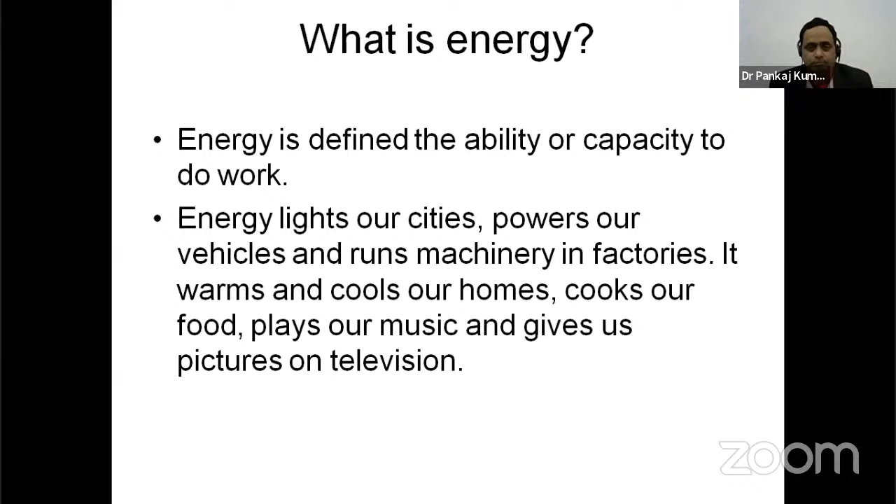What is the conservation of energy?

Already most of the people know about the conservation of energy. Energy can neither be created nor destroyed. It can only be converted from one form to another. It is very simple to understand the conservation of energy.

For example, in a room heater, electrical energy is converted to thermal energy. In a similar way, a turbine converts mechanical energy stored in steam to electrical energy. So how does energy convert from one form to another? This is simply known as conservation of energy.

If we go to previous times, energy use has changed a great deal since people relied solely on the sun, their own strong bodies, or beasts of burden as energy resources. So you see the power of the sun, the strong body, beast of burden as energy resources. This is our previous time.

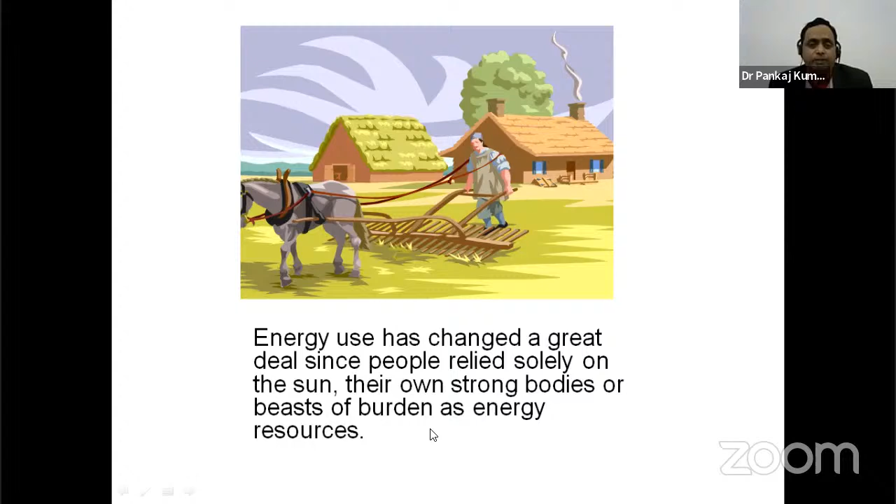And if we go in that direction, long ago, people learned how to use water power to turn paddle wheels and wind power for transportation and irrigation. This is a very typical time for agriculture and typical history about the use of energy.

So there are various problems in that direction. People learned how to use water power to turn paddle wheels and wind power for transportation and irrigation. This is our historical aspect.

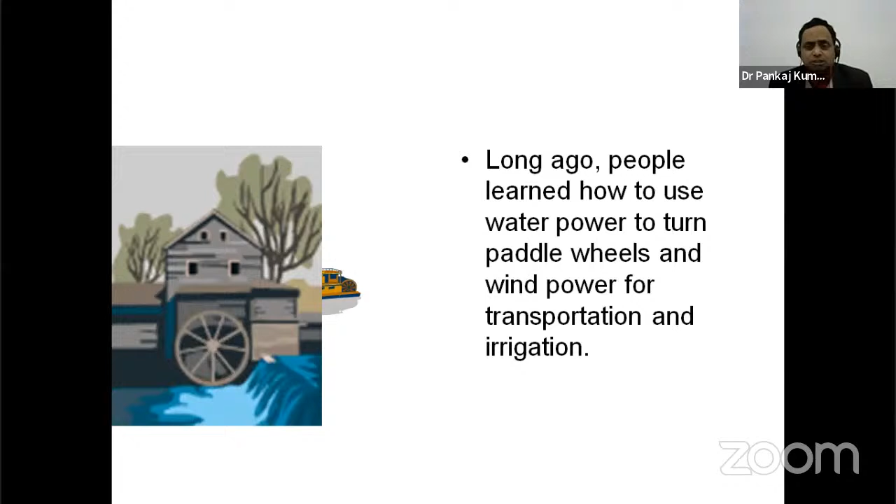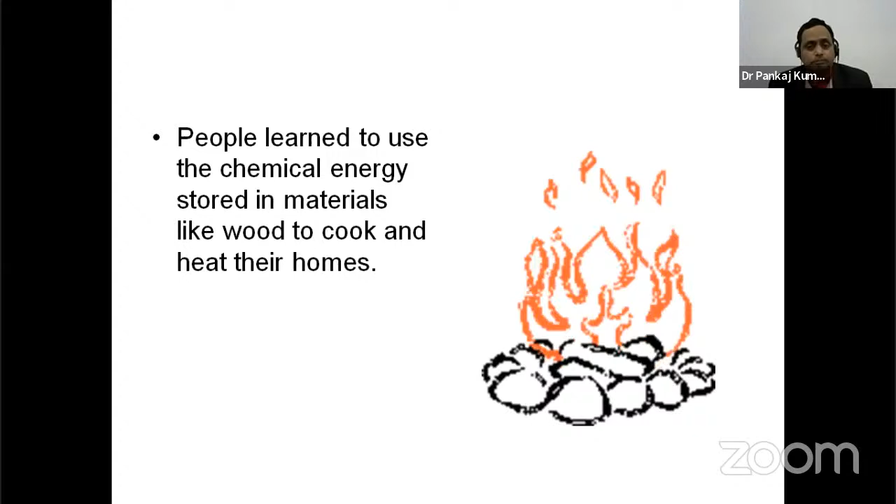People learned to use the chemical energy stored in materials like wood to cook and heat their homes. But machines and technologies introduced during the industrial revolution of the late 18th century required the use of other energy resources, especially fossil fuels.

There are types of energy. Mostly energy is used in two forms: one is known as renewable energy and the other is known as non-renewable energy. The basic difference between renewable and non-renewable energy is very clear. Renewable energy can be used and can be renewed, but non-renewable energy is used only once.

In renewable energy, it is the energy obtained from sources that are essentially inexhaustible, such as sun and wind. The power of the sun and wind we have used again and again. That is the natural phenomena which occurs in our daily life. So the sun is the ultimate source of renewable energy.

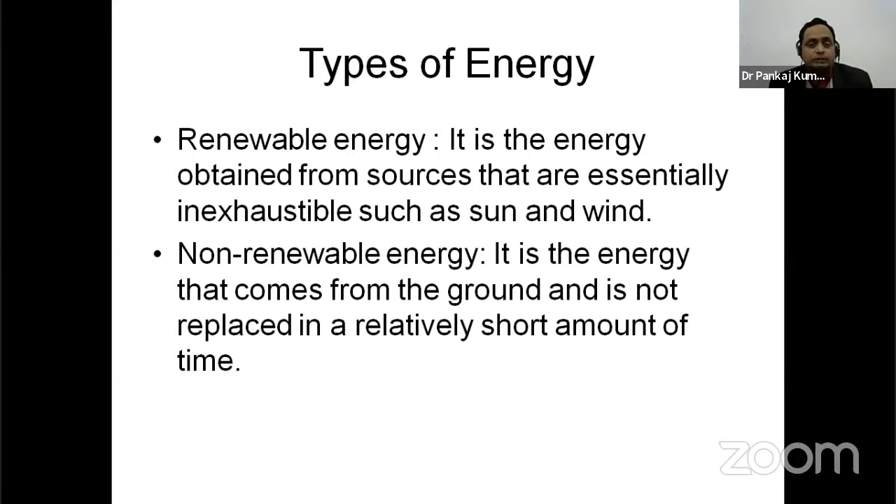When we think about non-renewable energy, it is the energy that comes from the ground and is not replaced in a relatively short amount of time. Non-renewable energy examples: thermal power plants using fossil fuels such as coal, petroleum oil, or natural gas. And you know very well about nuclear power plants. These sources are known as non-renewable energy sources.

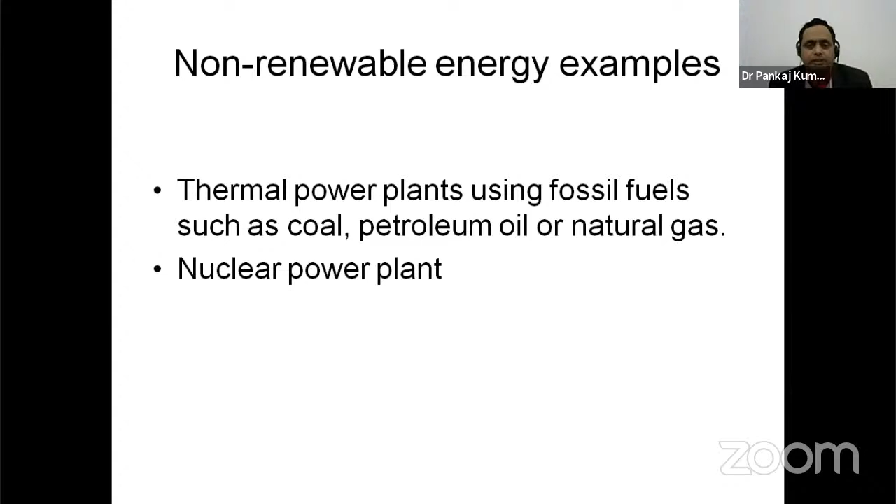If we think about renewable energy, a renewable energy system converts the energy found in sunlight, wind, falling water, sea waves, geothermal heat, or biomass into a form we can use, such as heat and electricity. So dear friends, heat and electricity can also be generated with the help of sunlight, wind, falling water, sea waves, geothermal heat, and biomass, and many more. So that will be the alternative source of energy in our daily life for daily phenomena.

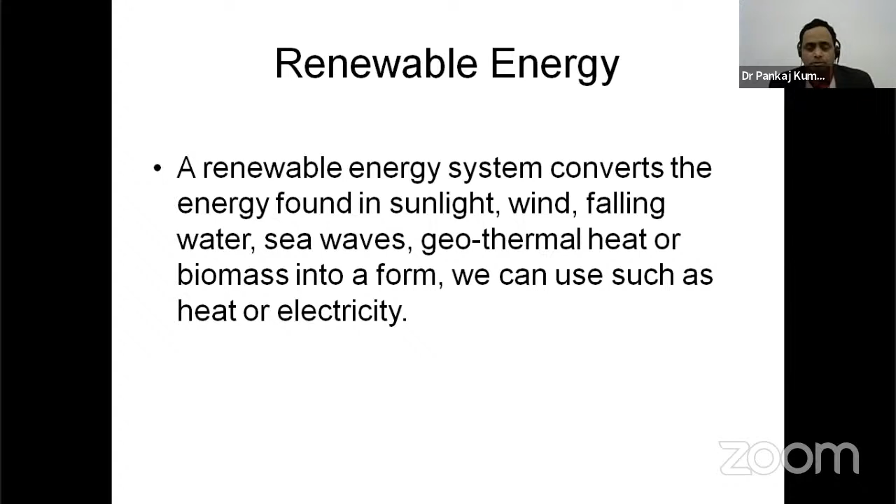If we think about renewable energy source examples, the concept is very clear in the form of solar energy, wind energy, hydropower energy, biomass, geothermal, tidal energy, wave energy, and OTEC, ocean thermal energy conversion.

In solar energy, you know very well about solar power, solar cooker, solar TV, solar bulb, and solar homes also. And in South India, most people are using wind energy to convert energy. So it is also known as wind energy converted into electrical energy.

Hydropower: when turning water, then electricity comes out from the running water or the turning water, this is known as hydropower. You know very well about biomass, and geothermal means the heat from the earth. When heat generates from the earth, it can be converted into mechanical energy and then electrical energy also.

You see, in the sea there are tidal energy due to the tides and waves, and wave energy, and ocean thermal energy conversion OTEC is very important. So these are the renewable energy examples we have to use in India day by day.

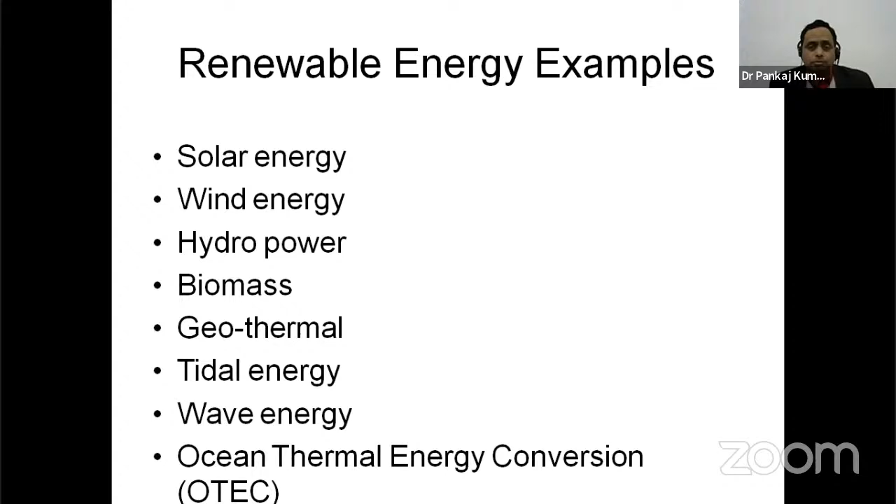If you think about solar power, it is a promising renewable energy resource that can be turned into electricity, and it is used in many toys and even home heating.

Wind power is increasingly being used as a clean source of renewable energy. Turbines harvest wind on wind farms and generate electricity. So wind energy is nothing but wind energy converted into electricity. Okay, so this is a very alternative source.

Hydroelectric plants use running water to generate electricity. However, they may flood nearby lands and can disturb the normal flow of water, both of which negatively affect the environment. So hydroelectric power plants have some advantages and some disadvantages also.

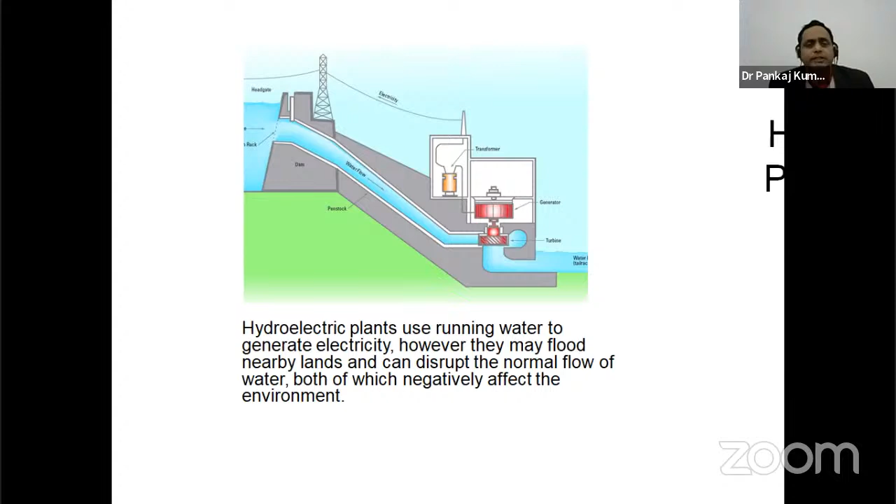This is a typical picture of hydroelectric plants. Tidal power is a form of hydropower that converts the energy obtained from tides into electricity. This is the sea, the nearby area, substation, lock, power plant, inactive dike, gate, and operating dam - these are the requirements for producing tidal power into electricity.

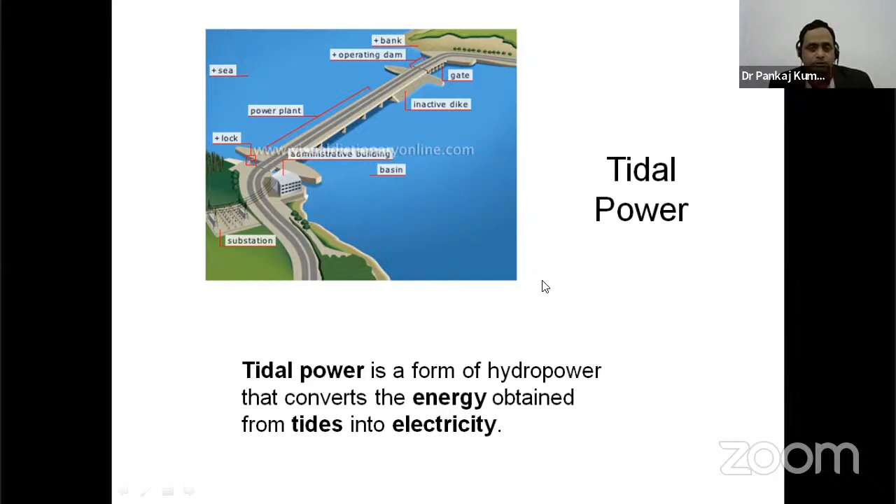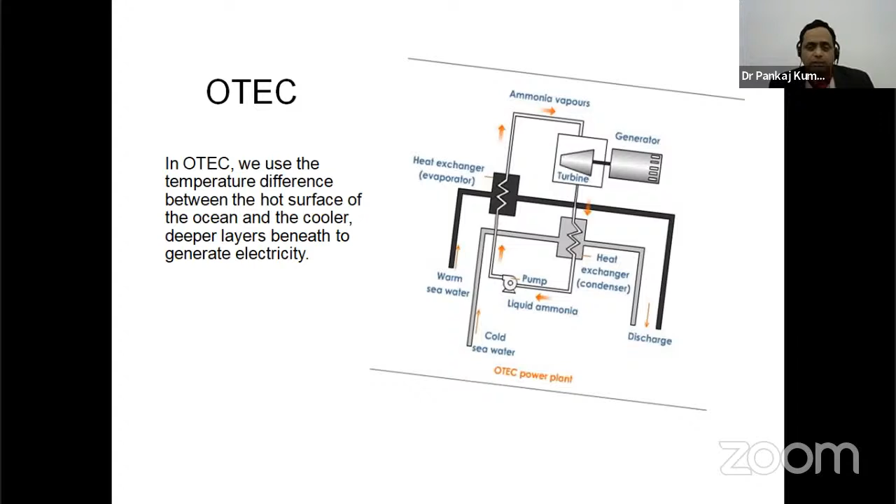In OTEC, we use the temperature difference between the hot surface of the ocean and the cooler, deeper layers to generate electricity. In this OTEC power plant, warm water and cold water can be pumped to vaporize ammonia, and after passing through the turbine, with the help of a generator, they produce electricity. The hot junction and cold junction in the form of hot water and cold water in the OTEC power plant is a very interesting phenomenon and can be used day by day as an alternate source of energy. So we have to create awareness about OTEC power plants.

In continuation, energy conservation is the practice of decreasing the quantity of energy used for the same quality and quantity of output. It may be achieved through efficient use, in which case energy use is decreased while achieving similar outcomes. Energy conservation also includes prevention of misuse of energy.

This is a very important term. Misuse of energy prevention is the alternate aim of energy conservation. Now the question is, why conserve energy? What is the aim of energy conservation? The answer is very clear.

Our energy demands are continuously increasing, about 14% per year. If we see the data of 2015 to 16, India's energy demand was 1114408 MU and availability was 1090851 MU, a 2.1% shortage. Similarly, peak demand was 153366 megawatt and availability was 148,463 megawatt, a 3.2% shortage. So you see, the shortage of energy increased from 2.1% to 3.2%.

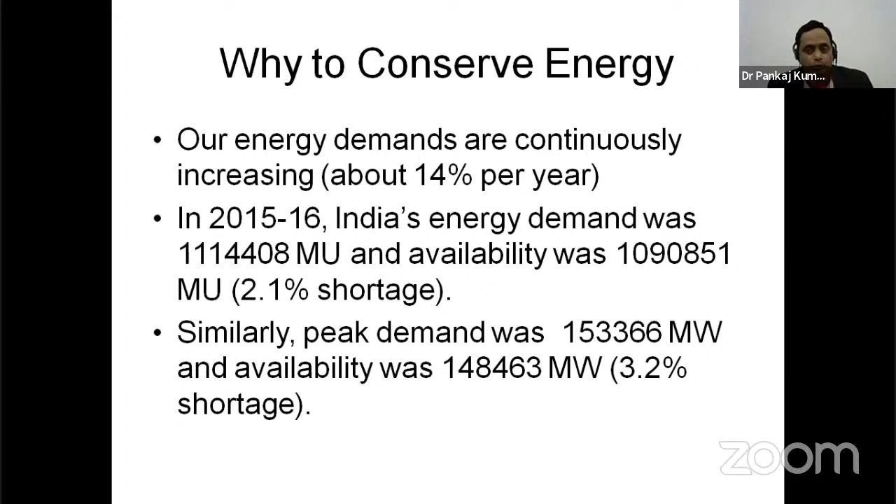How can you save energy? How can you conserve energy? By preventing the misuse of energy. To make up the gap between demand and supply, new power plants have to be installed, which requires capital and time.

To meet the growing demand, it has been assessed that additional generating capacity of 1 lakh megawatt has to be added by 2017, requiring an investment of approximately 8,00,000 crore. An alternative is energy conservation. Energy conservation measures can reduce power demand and the need for building additional generating capacity, to the extent it can be conserved.

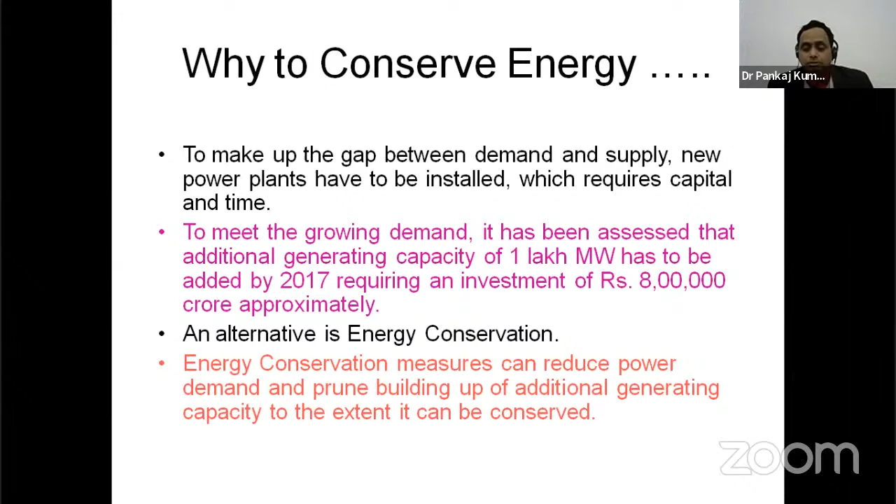We have limited resources of fossil fuels available on earth. 60% of these resources are consumed so far. So what about the remaining 40%? We need sustainable growth and to save resources for future generations.

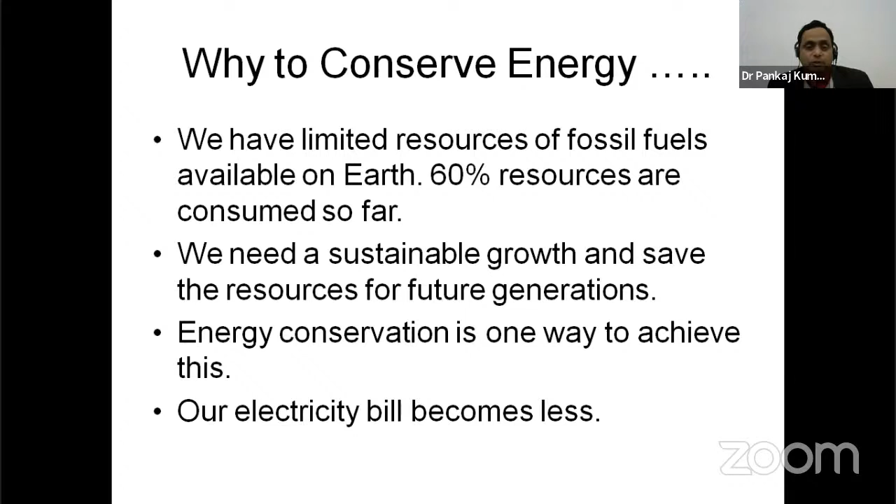Energy conservation is one way to achieve this. Our electricity bill becomes less. Thermal power shares about 65% of total electricity in India and also in the whole world. Poisonous gases such as carbon monoxide, nitric oxide, sulfur oxide, and fly ash are released into the atmosphere, causing environmental pollution. CO2 is released, which is the main factor for global warming and climate change.

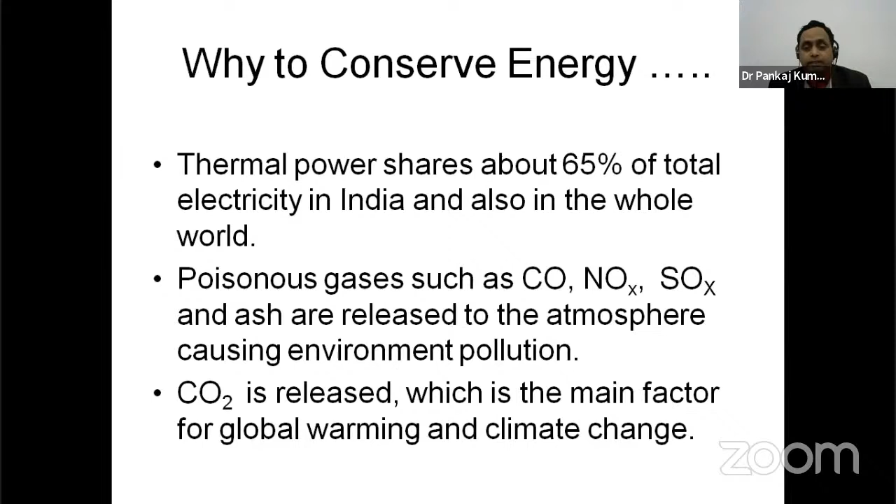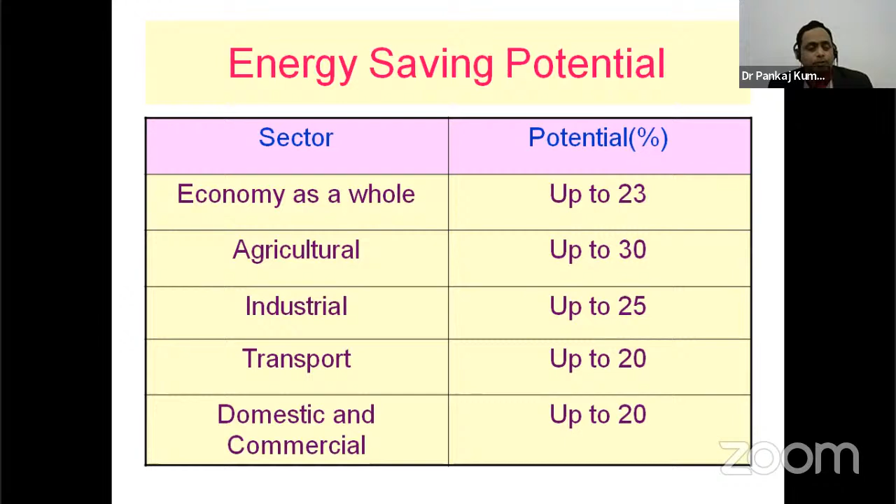Energy saving potential: if we see sector versus potential, economy as a whole has up to 23%, agriculture up to 30%, industrial up to 25%, transport up to 20%, and domestic and commercial up to 20%. So this is the energy saving potential nowadays.

Electricity used for lighting: nearly 10% of electricity is consumed for lighting in residential and commercial buildings. This amounts to a connected load of approximately 11,000 million watts and annual electricity consumption of 50 billion kilowatt hours. So you have to differentiate the data.

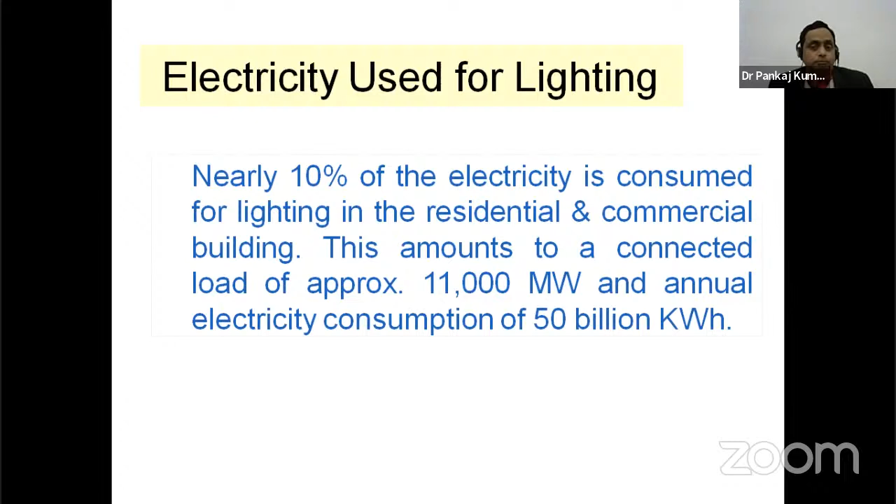Energy savings in lighting system. We have to make maximum use of natural light. If we use natural light, then it is the best way for energy conservation.

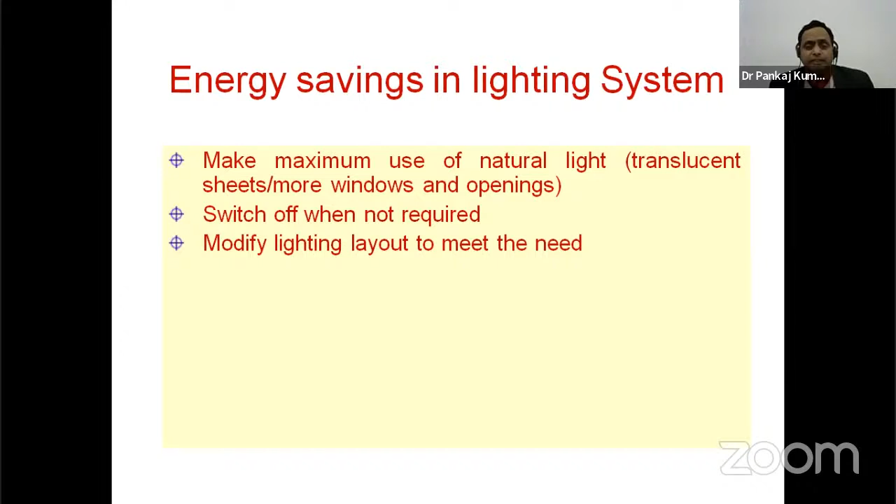Switch off when not required. You have to switch on to use, but when not used, switch off when not required. Modify lighting layout to meet the need. Select light colors and interiors. Provide time switches, photovoltaic controls, and photo sensors.

Providing lighting transformer to operate at reduced voltage. Install energy efficient lamps and controls. Clean the sheet and luminaries regularly.

So think about this difference. Where is 50,000 hours? Where is 1200 hours? Where is 8,000 hours? Which is more efficient to prevent the misuse of energy? How can you save energy? So if you are using light bulbs, they should be replaced by LEDs.

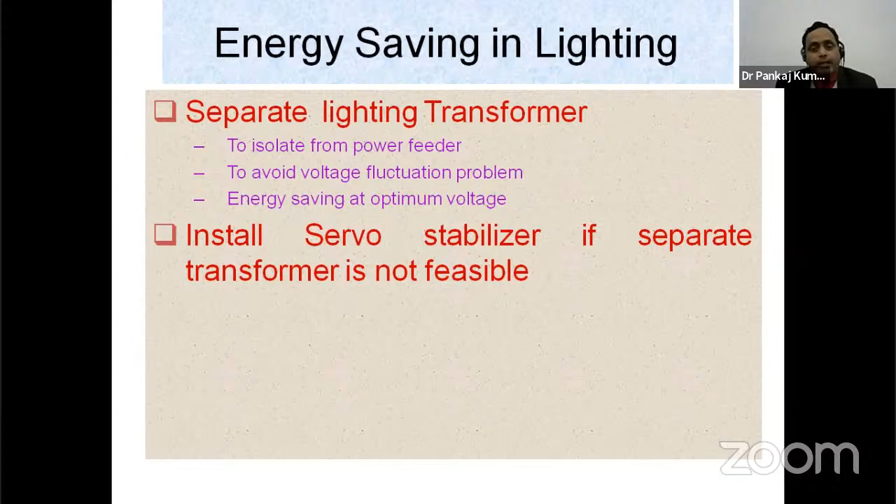Separate lighting transformer: another arrangement is a separate lighting transformer to isolate from the power feeder to avoid voltage fluctuation problems, enabling energy saving at optimum voltage. Install a servo stabilizer if a separate transformer is not feasible.

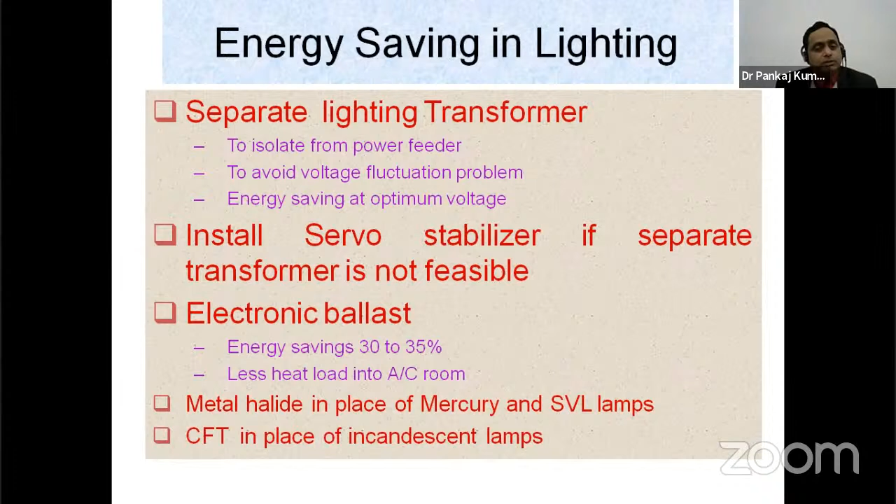In electronic ballast, energy savings of 30 to 35% and less heat load into the AC room. Use metal halide in place of mercury and SVL lamps. Use CFL in place of incandescent lamp.

If you want energy saving in fans, fans are used extensively in summer months. Use of high efficiency fan motor and electronic regulator in place of conventional resistance regulator can lead to about 20% saving in energy. Fans with aerodynamic designs and improved impeller consume about 20% less energy but are 30% costlier compared to conventional fans. So you can replace the fan with this technology.

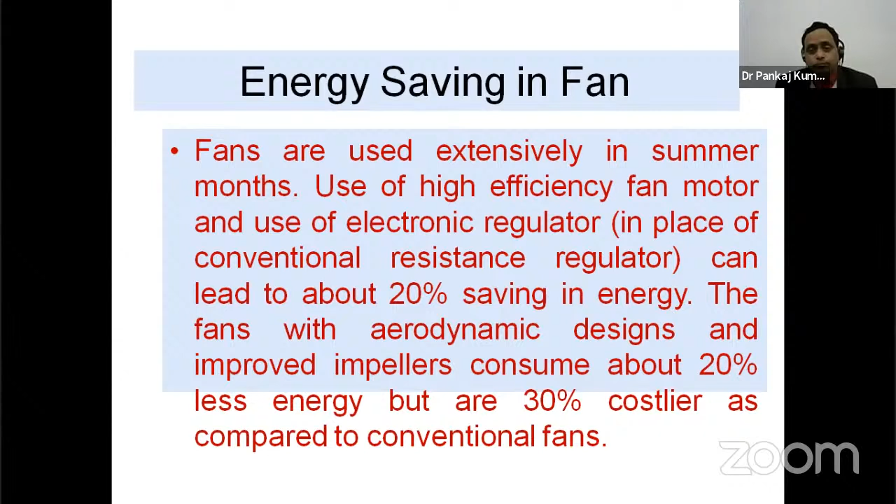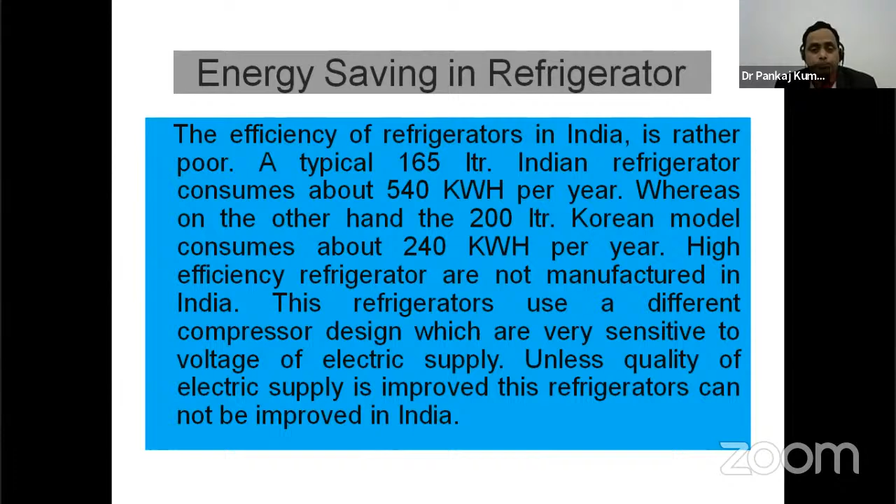High efficiency refrigerators are not manufactured in India. These refrigerators use a different compressor design which is very sensitive to voltage of electricity supply. Unless quality of electric supply is improved, these refrigerators cannot be improved in India.

Energy conservation in industries: prevention of misuse of energy in the industrial sector, energy saving potential in different industrial equipments like boiler, compressor, furnace, diesel generating set (DG set), motor, pump, and refrigeration. Thinking about new technology for these, it's very important to know how to save energy from motors.

Electric motors are the heart of industries. Out of the total motors in operation, 98% are induction motors. Induction motors consume 70% of total electrical energy generated.

Capacity of motors in the form of torque is directly proportional to the square of the voltage.

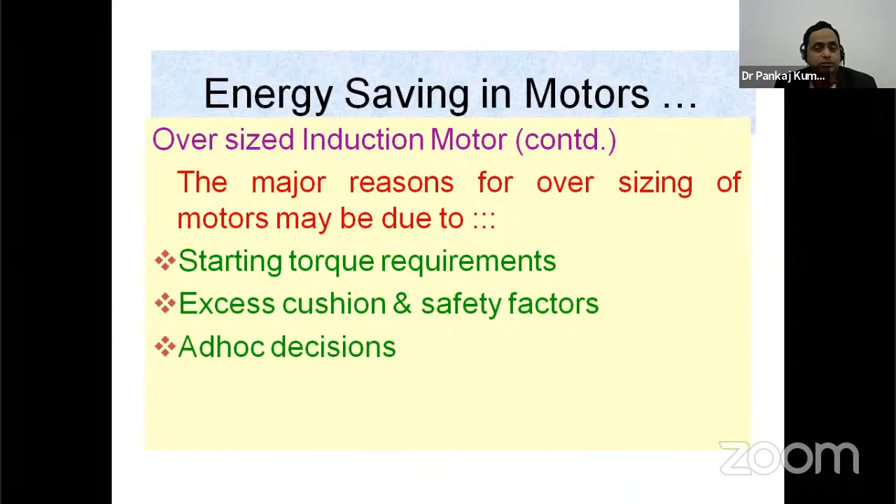Oversized induction motor: the major reasons for oversizing motors may be due to starting torque requirements, excess and safety factors, and ad hoc decisions.

In the rewound motors: rewound induction motors are common in Indian industries, especially in textiles, paper industries, and the unorganized sector such as small flour mills, lathe shop, and agriculture farms. Induction motors are used even after more than 4 times rewound.

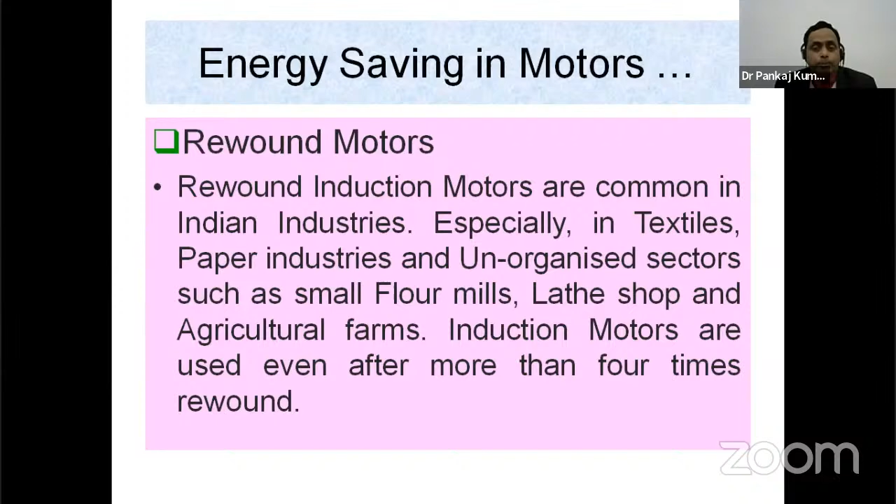Compressed air is used in almost all types of industries and accounts for a major share of electricity used in some plants. It is utilized for a variety of end uses such as tools, equipment, and instrumentation, and is preferred in industries because of its convenience and safety.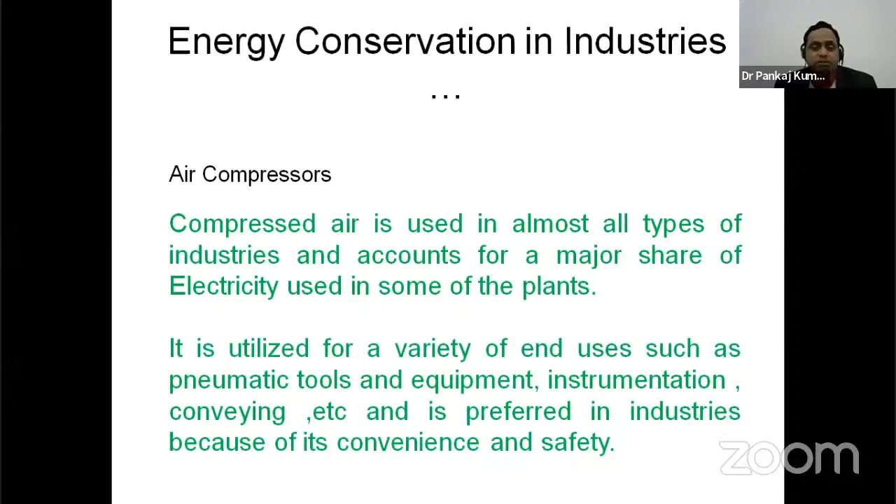Compressed air is very energy intensive. Only 5% of electrical energy is converted to useful energy.

Use of compressed air for cleaning is rarely justified. Ensure low temperature of inlet air. An increase in inlet air temperature by 3 degrees centigrade increases power consumption by 1%.

It should be examined whether air at lower pressure can be used in the process. Reduction in discharge pressure by 10% saves energy consumption up to 5%.

A leakage from a half-inch diameter hole from a compressed air line working at a pressure of 7 kg per centimeter square can drain almost rupees 2,500 per day. This is a very big amount if you multiply it for others.

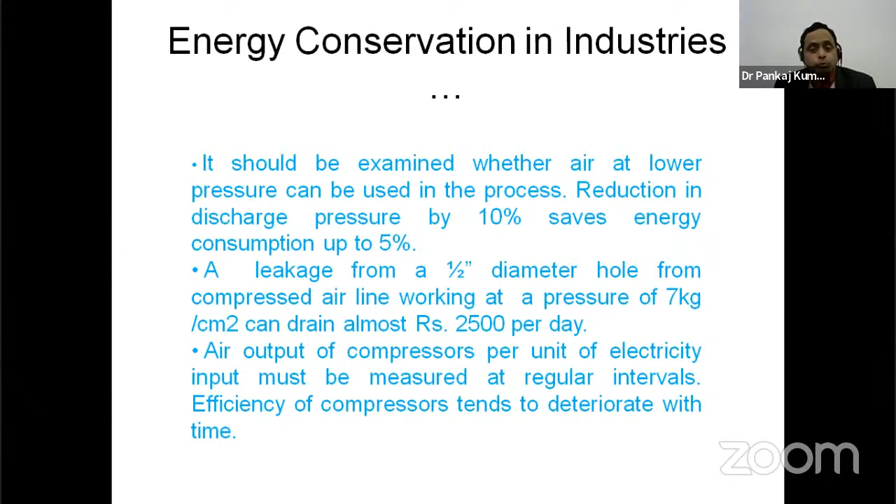Air output of compressor per unit of electricity input must be measured at regular intervals. Efficiency of compressors tends to deteriorate with time, so it should be improved.

A cooling tower is a specialized heat exchanger in which two fluids are brought into direct contact with each other to effect the transfer of heat. In spray-filled towers, this is accomplished by spraying a flowing mass of water into a rain-like pattern, through which an upward moving mass flow of cool air is induced by the action of a fan.

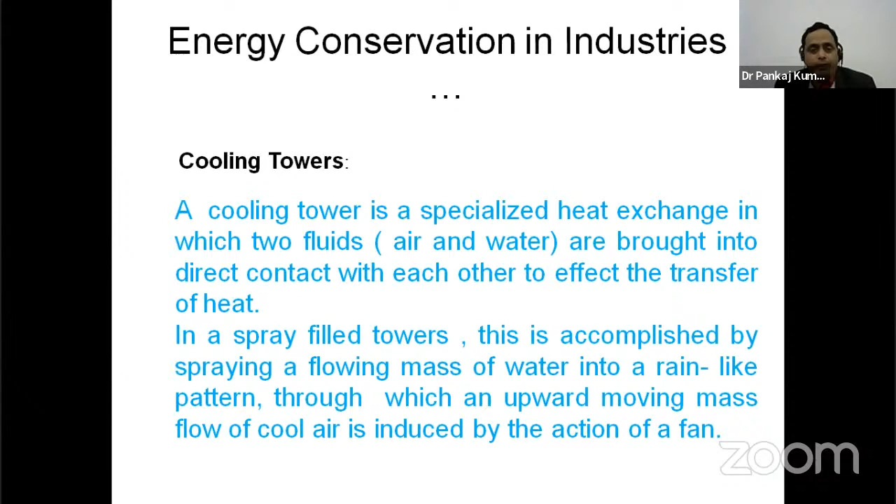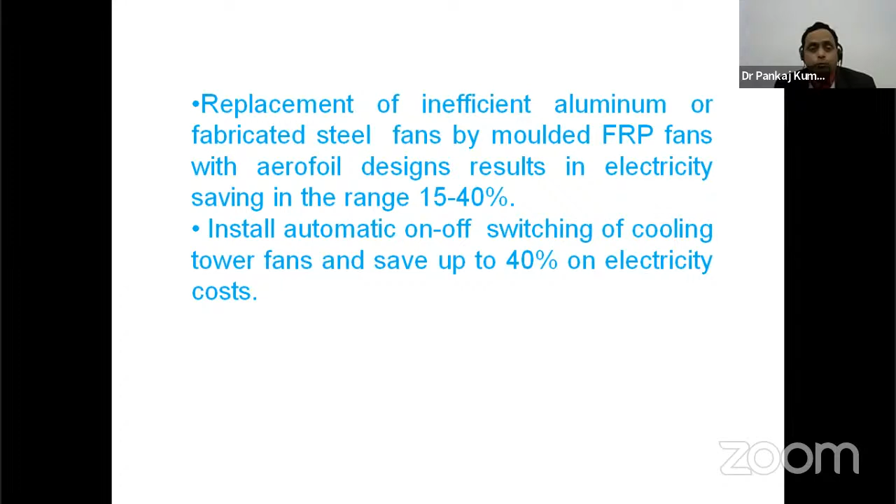Replacement of inefficient aluminum or fabricated steel fans by molded FRP fans with aerofoil design results in electricity savings in the range of 15 to 40%. Installing automatic on-off switching of cooling tower fans can save up to 40% of electricity cost.

If you think about the pumps, most industrial processes in and out of plants involve transportation of fluids, and the pump is the only mechanical means available to facilitate this transportation. The prime movers can either be an electric motor, a diesel engine, or a steam gas turbine. All prime movers consume energy - petroleum products like diesel, oil, or gas - to impart working capacity to the pump.

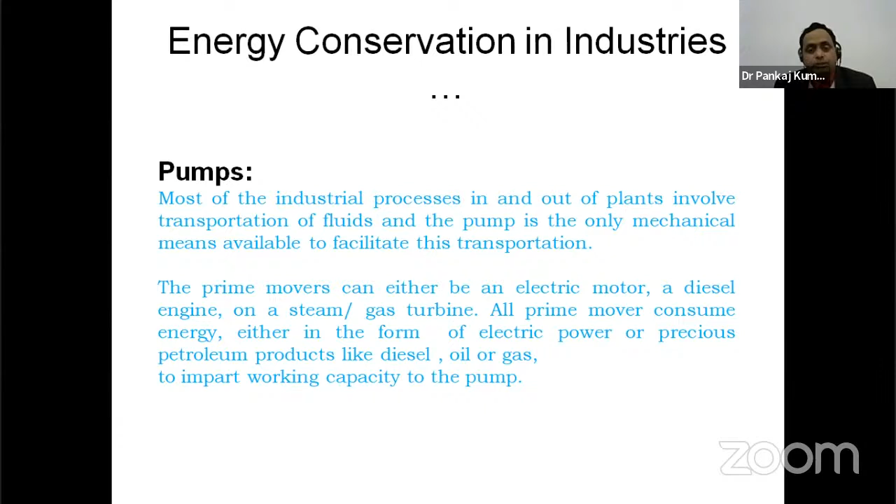Select a pump of the right capacity in accordance with the requirement. Improper selection of pump can lead to large wastage of energy. A pump with 85% efficiency at rated flow may have only 65% efficiency at half the flow. Ensure matching of the motor with appropriately sized pump.

Use of a throttling valve instead of variable speed drives to change flow of fluids is a wasteful practice. Throttling can cause wastage of power to the tune of 50 to 60%. Proper installation of the pump system, including shaft alignment and coupling of motor and pump, is a must.

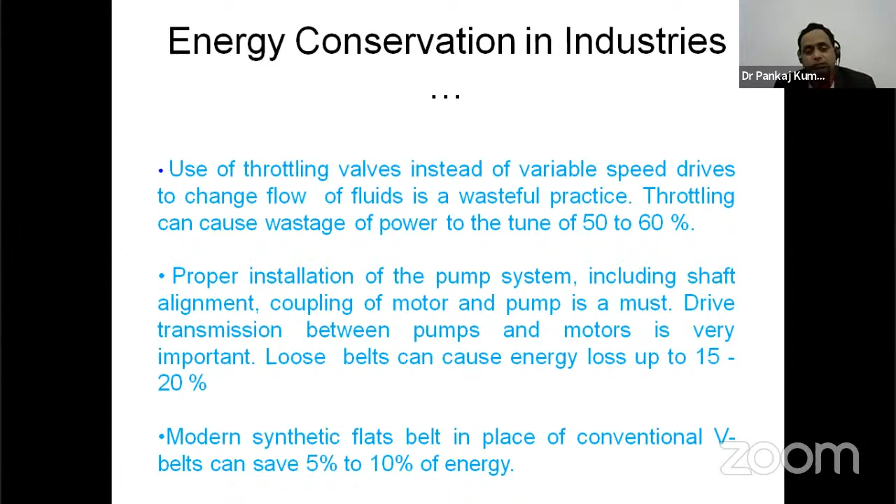Drive transmission between the pumps and motors is very important. Loose belts can cause energy loss of 15 to 20%. Modern synthetic flat belts in place of conventional V belts can save 5% to 10% of energy.

In refrigeration and air conditioning: refrigeration is the process of removing heat at a low temperature level and rejecting it at a relatively high temperature level. This is called refrigeration. The items required for the makeup of a complete refrigeration and air conditioning system are refrigerating equipment, fans, pumps, cooling towers, filters, air handling units, and ducting.

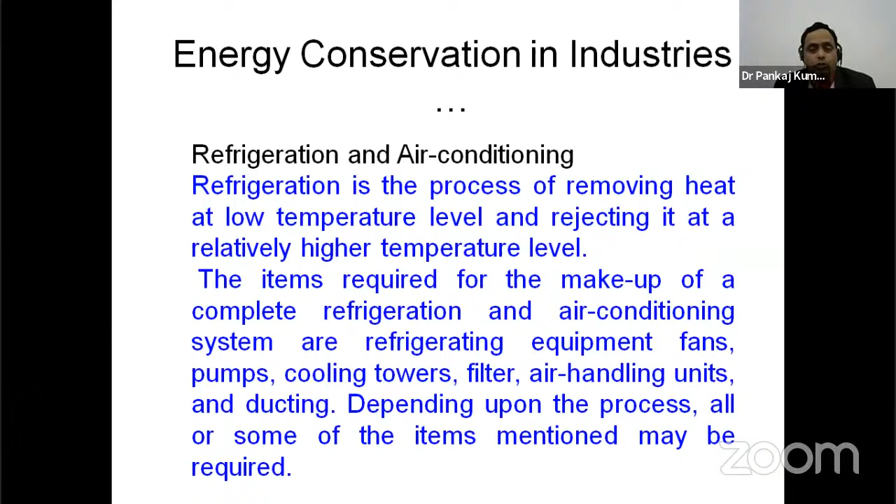Depending upon the process, all or some of the items mentioned may be required. Close doors and windows while running the air conditioner.

This is a very useful technique to prevent consumption of energy. Don't use a window fan while the air conditioner is on, but do use a ceiling fan.

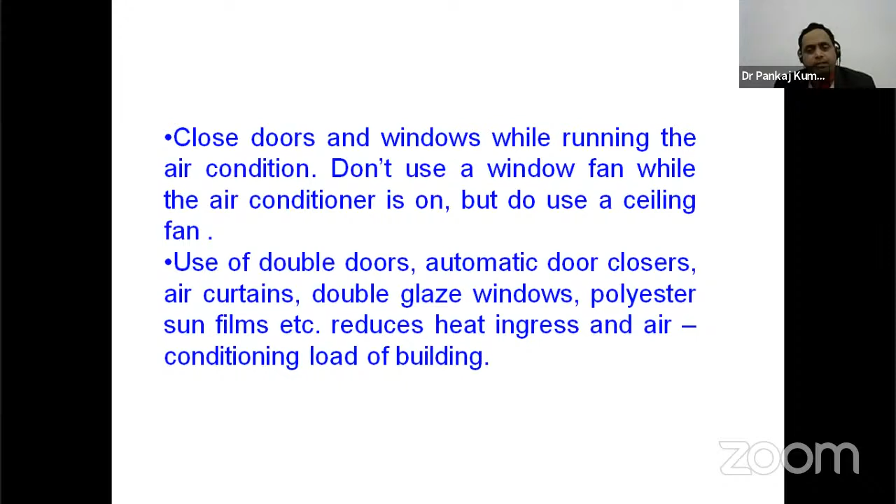Use of double doors, automatic door closers, air curtains, double glazed windows, polyester sun films reduce the heat ingress and air conditioning load of the building.

Maintain condensers for proper heat exchange. A 5°C decrease in evaporator temperature increases the specific power consumption by 15%.

The compressor of the central air conditioner should be located in a cool, shaded place outside. Specific power consumption of the compressor should be measured at regular intervals. The most efficient compressors should be used for continuous duty and others kept on standby.

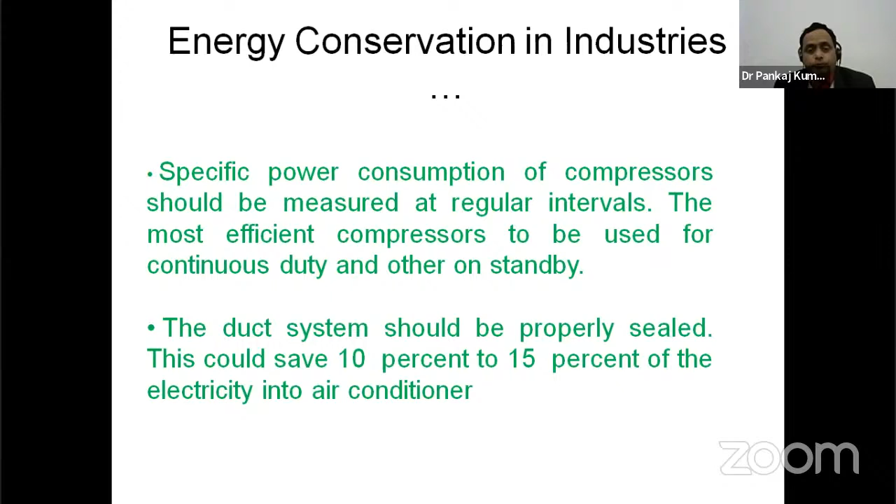The duct system should be properly sealed. This could save 10% to 15% of electricity in the air conditioner.

If we think about lighting, clean the lamps and fixtures regularly. Illumination level falls by 20 to 30% due to collection of dust.

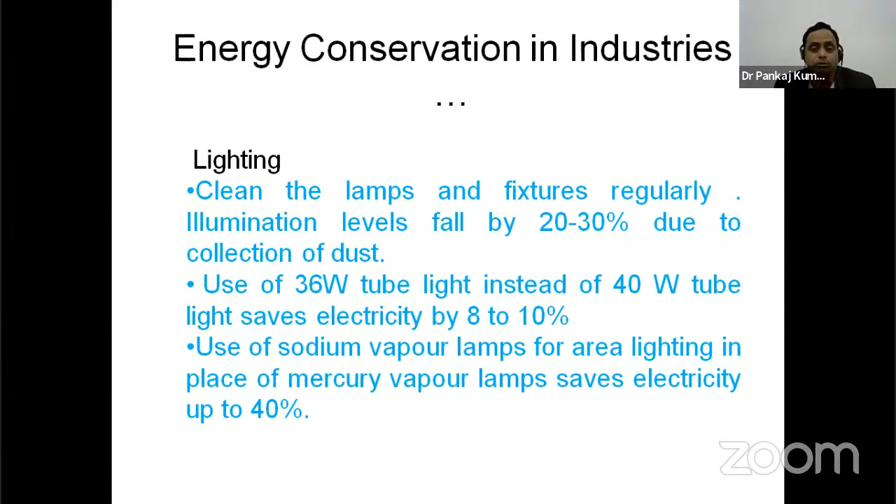Use of 36 watt tube light instead of 40 watt tube light saves electricity by 8 to 10%. Use of sodium vapor lamps for area lighting in place of mercury vapor lamps saves electricity up to 40%.

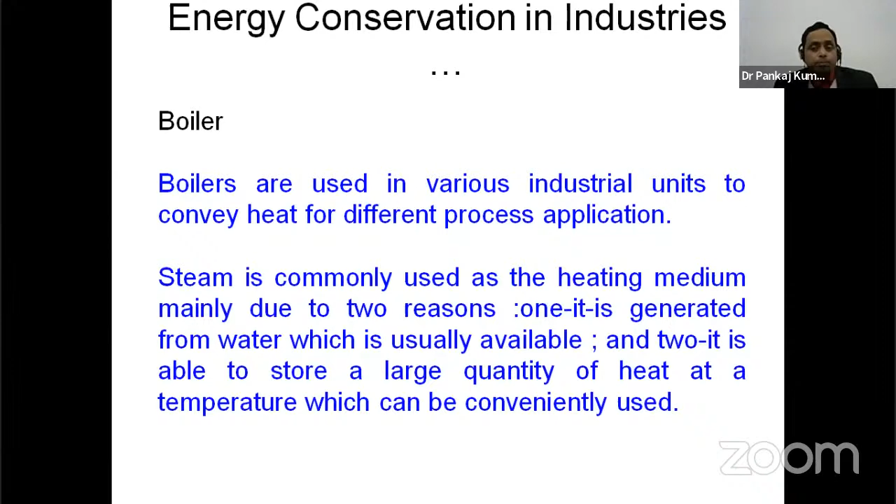The boiler is used in the industrial unit to convey heat for different process applications. Steam is commonly used as a heating medium mainly due to two reasons: one, it is generated from water which is usually available, and two, it is able to store a large quantity of heat at a temperature which can be conveniently used. Various types of fuels, namely coal, gas, biomass, etc., are used for steam generation in the boiler, depending on the availability of the fuel and cost economics prevailing in the plant.

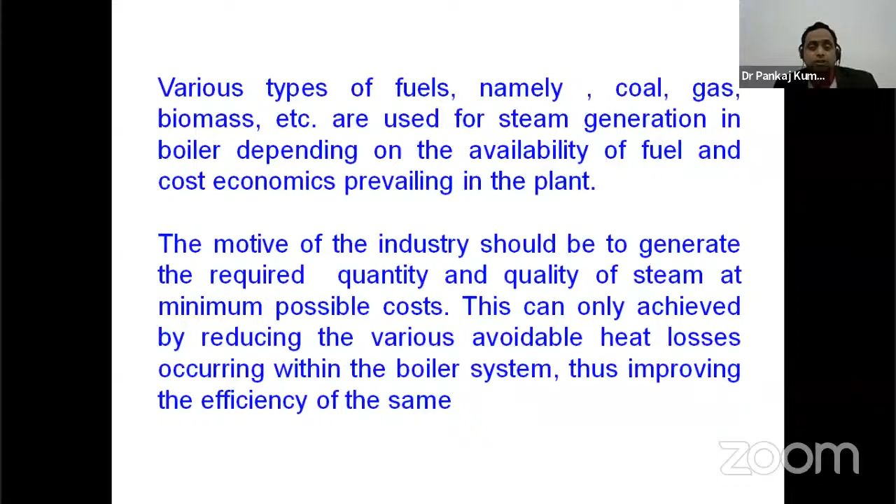The motive of the industry should be to generate the required quantity and quality of steam at minimum possible cost. This can only be achieved by reducing the various avoidable heat losses occurring within the boiler system, thus improving its efficiency. All possible attention should be paid to control excess air by monitoring oxygen level in flue gas and also by inspection of the flame color.

Remove soot deposits when flue gas temperature rises 40 degrees centigrade above normal. A coating of 3 mm thick soot on the heat transfer surface can cause an increase in fuel consumption of as much as 2.5%. Soot blowers should always be maintained in good working condition so that their regular and periodic use does not suffer.

Recover heat from the steam condensate. For every 6 degrees centigrade rise in the boiler feed water temperature through condensate return, there is a 1% saving in fuel.

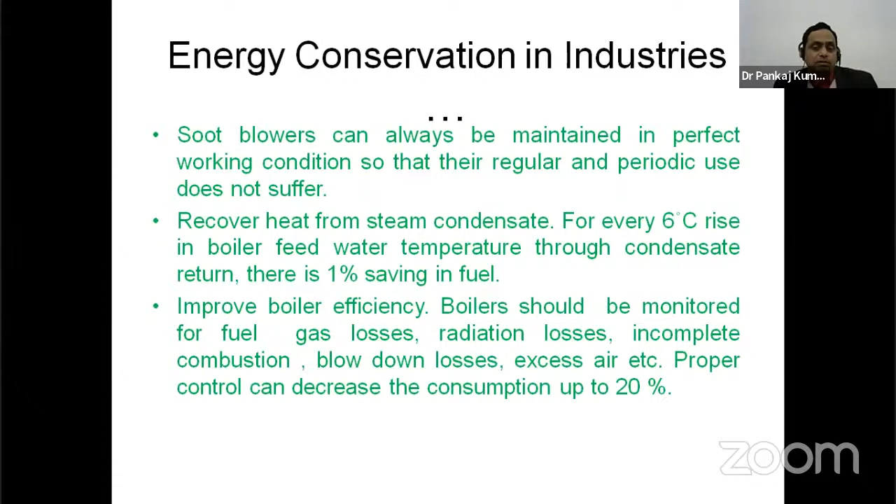Improve boiler efficiency. The boiler should be monitored for flue gas losses, radiation losses, incomplete combustion, blow down losses, and excess air, with proper control, to decrease consumption by up to 20%.

Use only treated water in boilers. The formation of 1 mm thickness of scale on the water side increases fuel consumption by 5 to 8%.

Stop steam leakage. Steam leakage from a 3 mm diameter hole on a pipeline carrying steam at 7 kg per square centimeter would waste 32 kilolitres of fuel oil per year, amounting to a loss of rupees 3 lakhs.

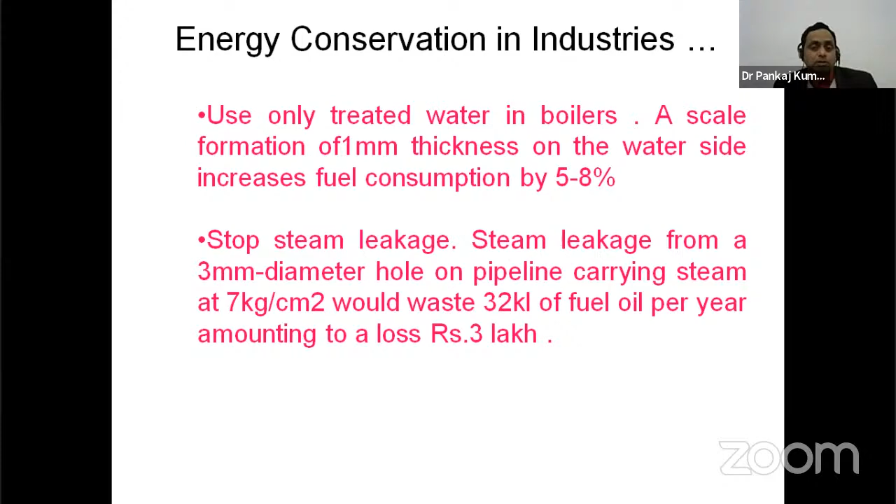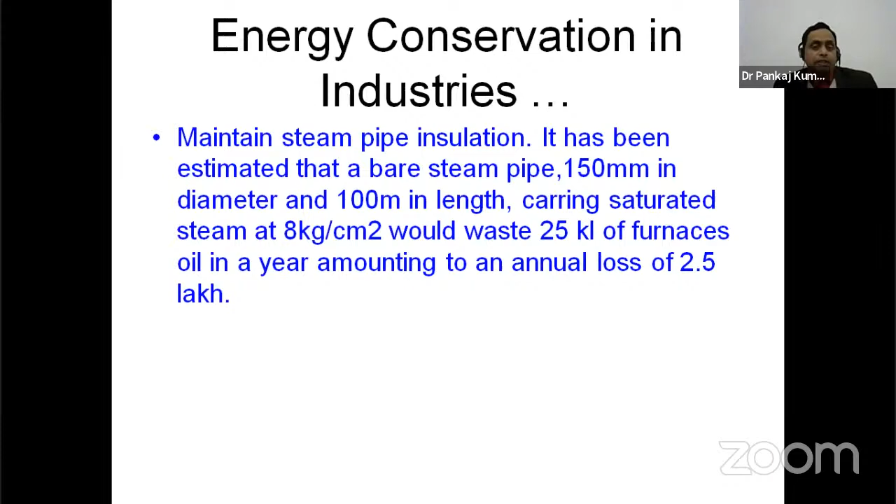Maintain steam pipe insulation. It has been estimated that a bare steam pipe 150 millimeter in diameter and 100 meter in length, carrying saturated steam at 8 kilogram per centimeter square, would waste 25 kilolitres of furnace oil in a year, amounting to an annual loss of 2.5 lakhs.

If we think about DG sets, depending on the type of industry and the magnitude of the connected load, DG sets are employed in various modes like the standby mode to meet part of the full requirement of the plant in case of power failures, and the peak load mode to meet the requirement during peak demand, thereby reducing maximum demand.

Maintain the diesel engine regularly. A poorly maintained injection pump increases fuel consumption by 4 gram per kilowatt hour. Blocked filters increase fuel consumption by 2 gram per kilowatt hour. Measure fuel consumption per kilowatt hour of electricity generated regularly, and take corrective action in case it shows a rising trend.

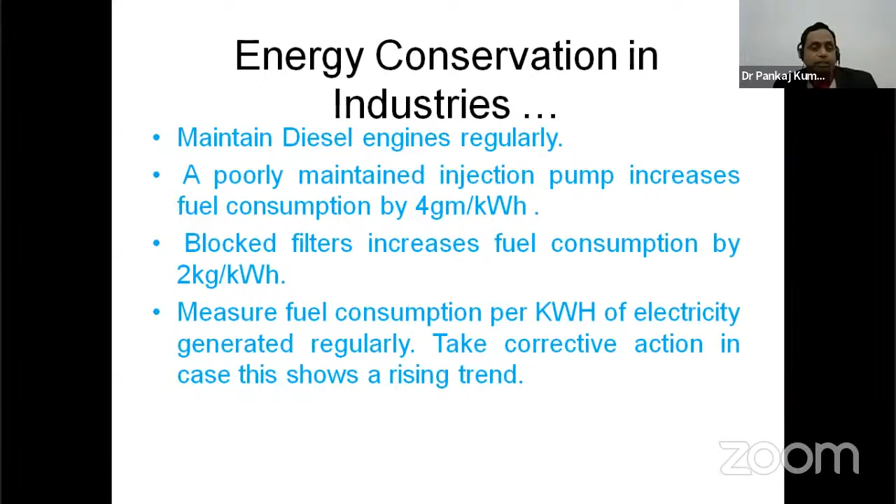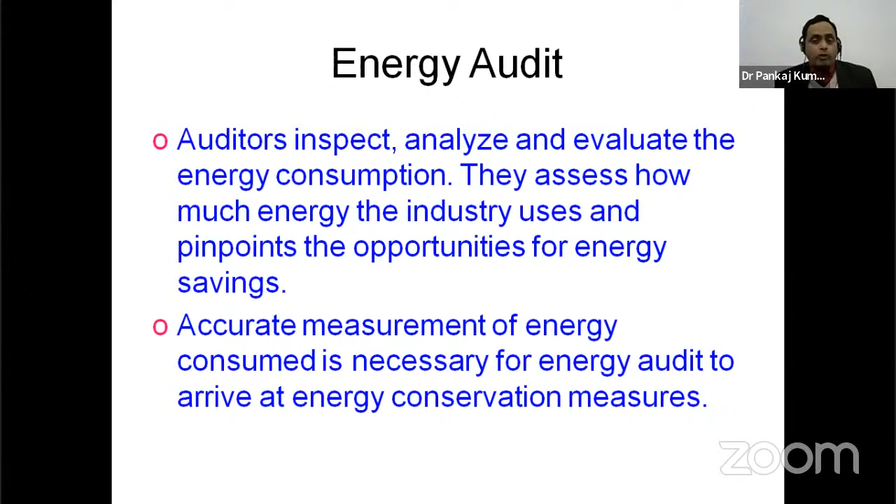So another way: by the efforts of the government of India, energy audit should be conducted, monitoring the consumption of energy. During the energy audit, auditors inspect, analyze, and evaluate the energy consumption. They assess how much energy an industry uses and pinpoint the opportunities for energy saving. Accurate measurement of energy consumed is necessary for the energy audit to arrive at energy conservation measures.

Energy conservation in distribution: reduction of line loss by replacing a smaller number of larger transformers with a larger number of smaller transformers located nearer the loads, thus reducing the length of the LT lines. Such an arrangement will result in better voltage, less outage, increased transformer life, easier replacement of failed transformers, and fewer consumers affected by transformer failures.

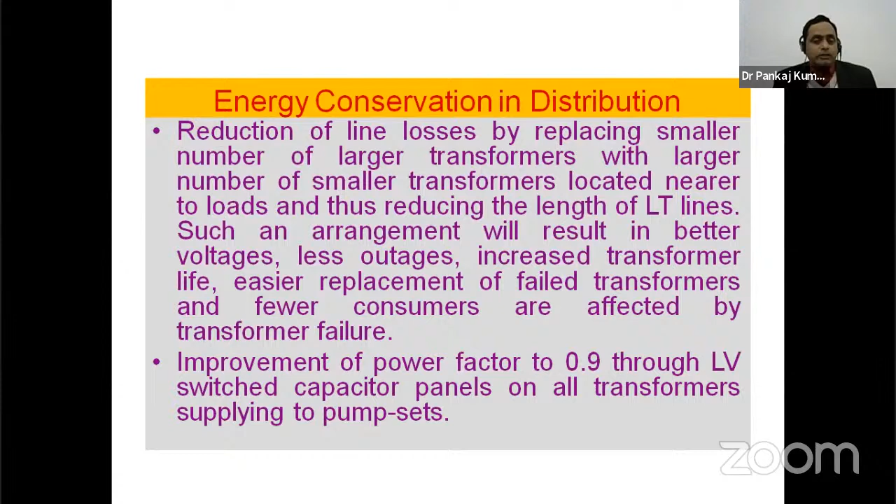And another way: improvement of the power factor to 0.9 through LV switched capacitor panels on all transformers supplying pump sets.

Use energy efficient transformers to reduce no-load losses. If you think about the transformer capacity and the loss with silicon steel versus the loss with amorphous steel: a 25 kVA transformer has 100 watt loss with silicon steel versus 25 watt with amorphous; a 63 kVA transformer has 180 watt versus 45; a 100 kVA transformer has 260 watt versus 60. So you think about these two combinations—whether silicon steel or amorphous metal should be used.

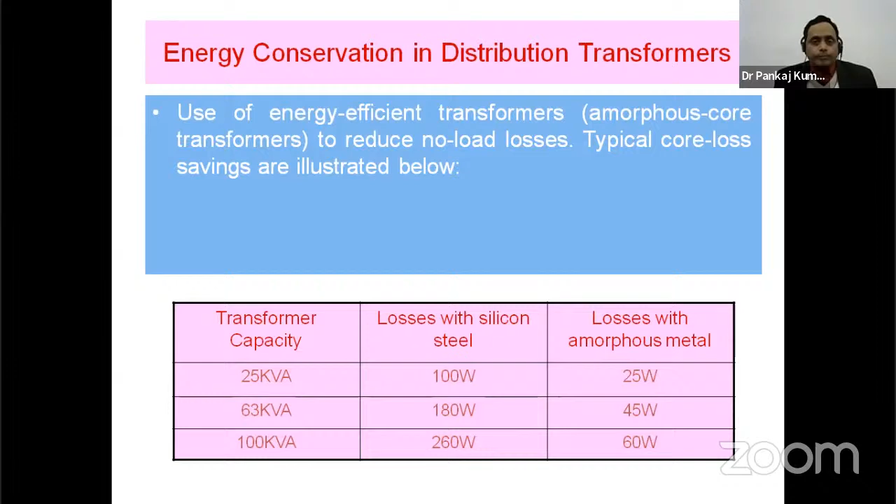It is very important to know about the consumption of energy and what we can do for conservation of energy, or for saving energy.

In our everyday lives, we can also work to conserve energy. Insulating, turning off lights, and only using appliances like dishwashers when they are full are just some of the ways people can limit energy use in their homes.

Turn off all electronic devices that are not in use. Not only turn them off, but try to remember to unplug them. You will be surprised how much you will save with this simple step.

Also, carpooling, bicycles, and taking public transportation are effective energy saving measures.

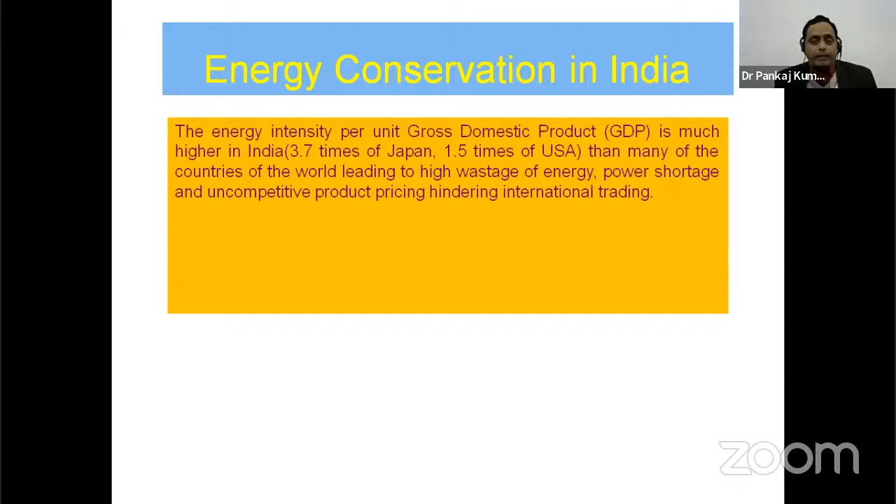The energy intensity per unit gross domestic product GDP is much higher in India: 3.7 times that of Japan, 1.5 times that of the USA, and also higher than many other countries of the world, leading to high wastage of energy, power shortage, and uncompetitive product pricing in international trading.

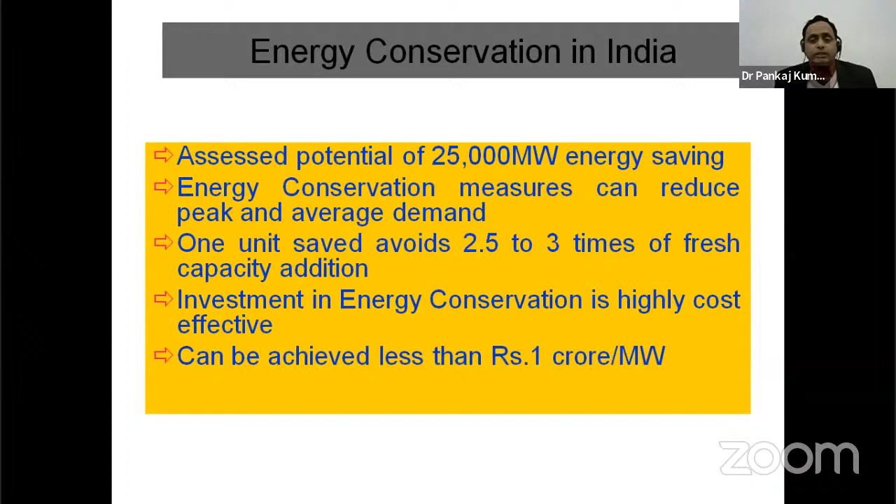Assessed potential of 25,000 megawatt energy saving. Energy conservation measures can reduce peak and average demand. One unit saved avoids 2.5 to 3 times of fresh capacity addition. Investment in energy conservation is highly cost effective, can be achieved at less than 1 crore per megawatt.

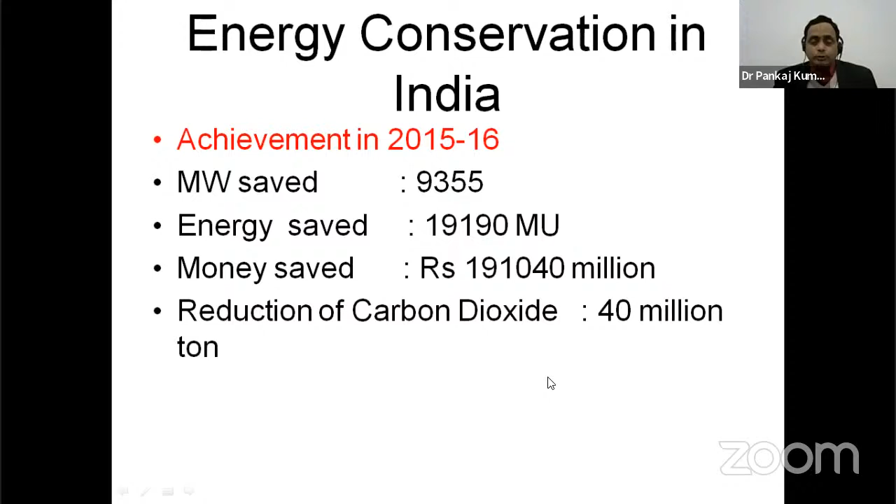In the achievement of the 2015-16 data, the MW saved was 9355 and energy saved was 19190 MU, and money saved was Rs 191040 million. This is the effect of the energy saving, and reduction of carbon dioxide by 40 million tons. This is the achievement in the year 2015-16: how much energy was saved, how much money was saved, and how carbon dioxide was reduced by 40 million tons. This is a big achievement by using this practice.

The government of India announced that misuse of energy is an offense. So in the legal aspects, the Energy Conservation Act was introduced by the government of India and enacted in October 2001, becoming effective from 1st March 2002. This is very important about the BEE, Bureau of Energy Efficiency, operational from 1st March 2002. So from 1st March 2002, energy misuse is a crime according to the law imposed by the government of India. You have to think about saving energy for the betterment of our nation, for becoming a good citizen, and playing a very vital role in energy saving for the nation.

Important features of the EC Act: standard and labeling, such as evolving minimum energy consumption and performance standards for notified equipments and appliances. It prohibits manufacture and sale of equipment and appliances not conforming to the standard, and introduces mandatory labeling to enable consumers to make an informed choice.

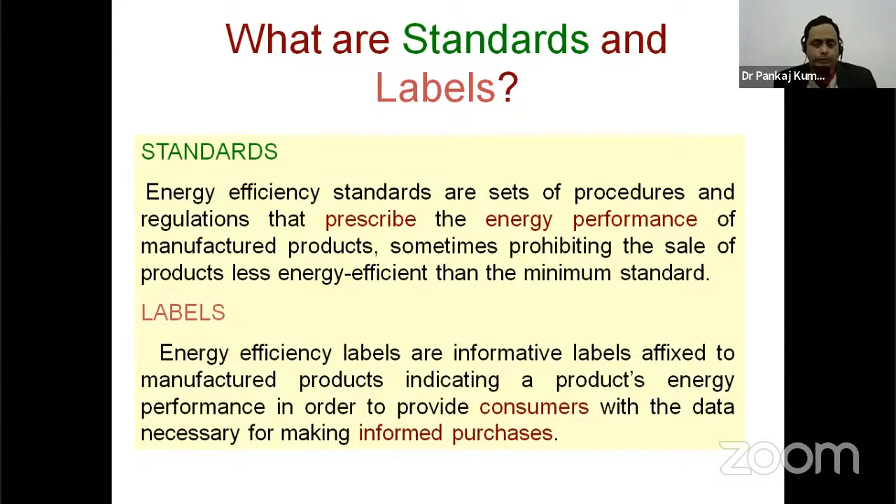If you think about labeling, energy efficiency labels are informative labels affixed to manufactured products indicating a product's energy performance, in order to provide consumers with the data necessary for making informed purchases.

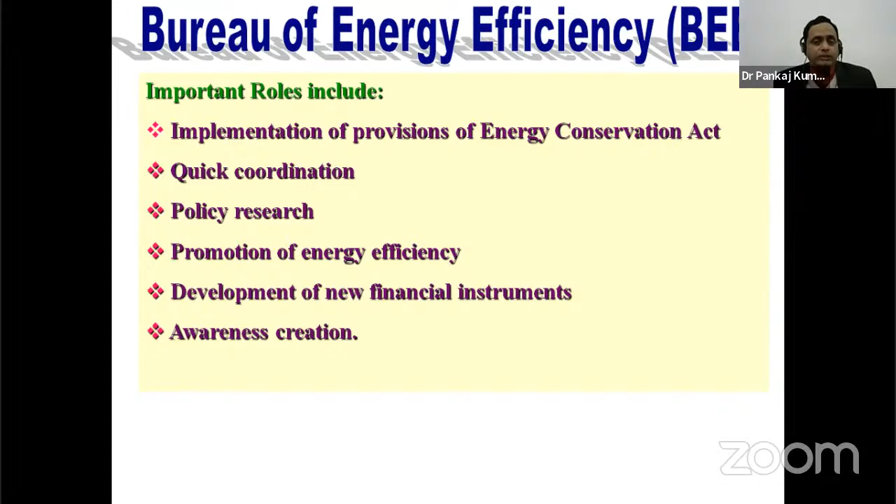The Bureau of Energy Efficiency has some important roles: implementation of provisions of the Energy Conservation Act, quick coordination, policy research, promotion of energy efficiency, development of new financial instruments, and awareness creation.

Energy Conservation Day: India observes 14th December as Energy Conservation Day to create awareness among the people. This is the main theme of our lecture.

The best way is green buildings. Green buildings are also a future technology for the prevention of energy waste, which play a very powerful role in energy saving. So you have to know about the concept of green buildings for a better future.

What is a green building? Green building is the practice of creating structures and using processes that are environmentally responsible and resource effective. We can also say that green building design and construction is a method of wisely using resources to create homes and commercial buildings that are high quality, healthier, and more energy efficient.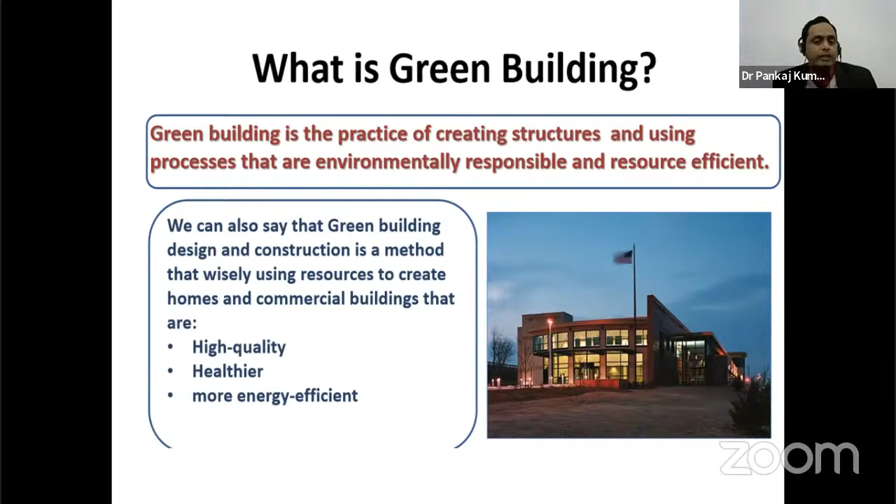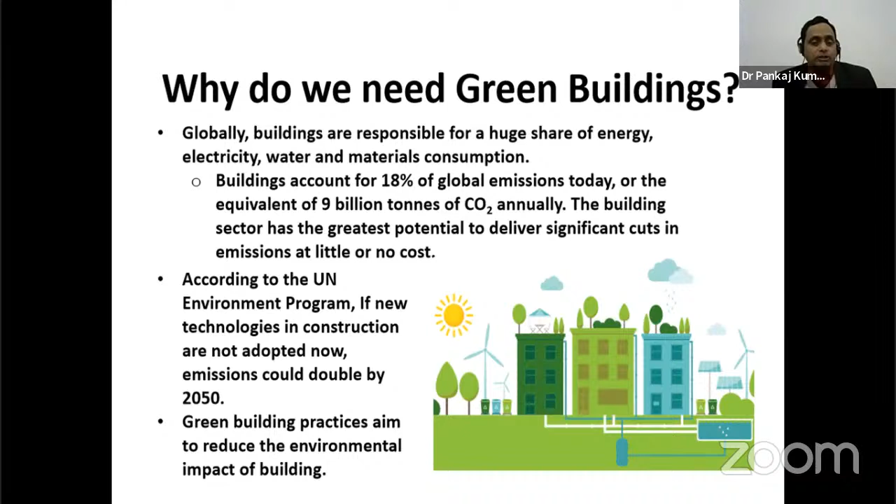Why do we need green buildings? Globally, buildings are responsible for a huge share of energy, electricity, water, and materials consumption. Buildings account for 18% of global emissions today, the equivalent of 9 billion tons of carbon dioxide annually. The building sector has the greatest potential to deliver significant cuts in emissions at little or no cost. According to the United Nations Environment Program, if new technologies in construction are not adopted now, emissions could double by 2050. Green building practices aim to reduce the environmental impact of buildings.

This is the important features of green buildings. You have to maintain green building and construct about the green building. There are 5 principles of green buildings.

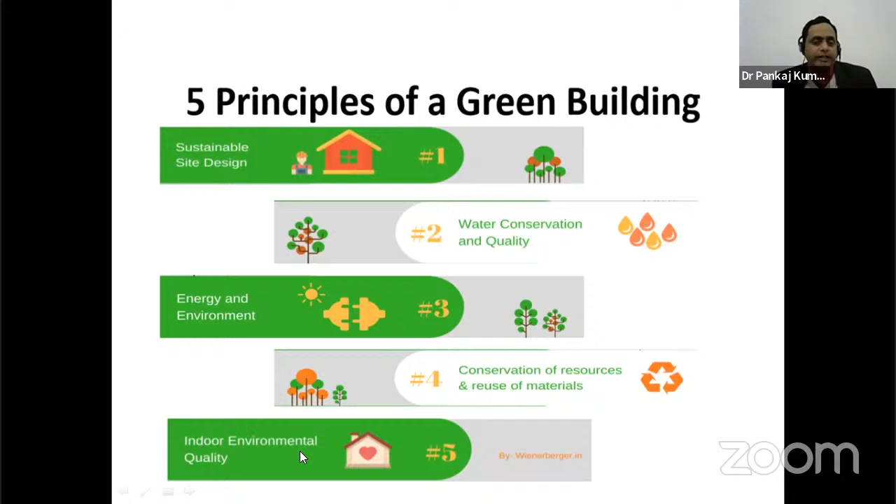One is sustainable site design and water conservation and quality, energy and environment, conservation of resources and reuse of materials, and indoor environment quality. These are the green building benefits.

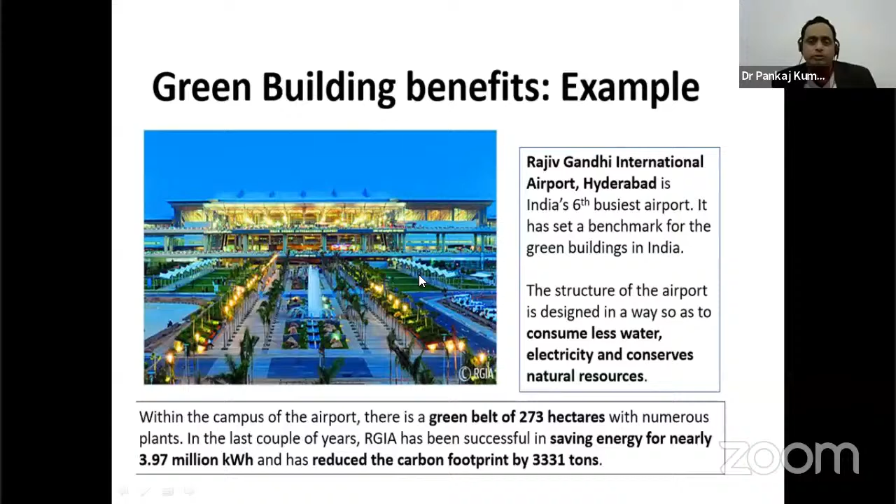I hope you have seen about the green building. So what is the LEED certification? Any green building certified by the USGBC, US Green Building Council. The US Green Building Council has a certificate in the form of the LEED.

So what is the LEED? And what is the history of LEED? The US Green Building Council, co-founded by David in 1993 as a non-profit trade organization, is the developer of the LEED green building rating system. When you have constructed the green building, it must be certified by the LEED.

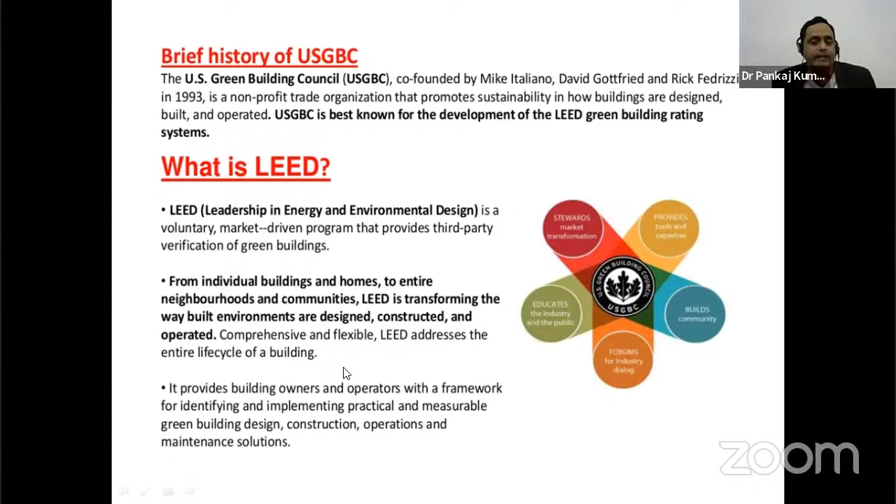What is the LEED? LEED is the Leadership in Energy and Environmental Design. This certification must be achieved by the owner of a green building in a voluntary market-driven form, from individual buildings and homes to entire neighborhoods and communities. LEED is transforming the way built environments are designed, constructed and operated. Comprehensive and flexible, LEED addresses the entire life cycle of the building.

Why LEED? Why the requirement of LEED? LEED certified buildings are designed to lower operating cost, increase asset value, and reduce harmful greenhouse gas emissions. Energy use is reduced by 24 to 50%, CO2 emission by 33% to 39%, water use by 40%, and solid waste by 70%.

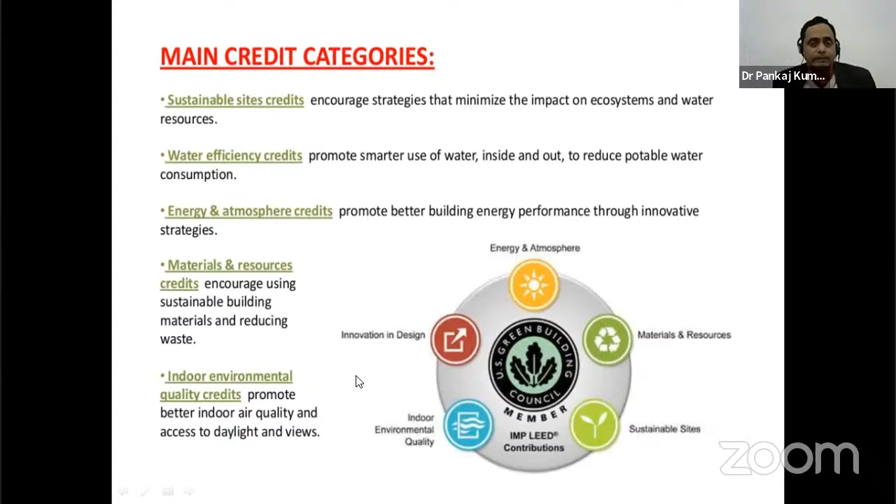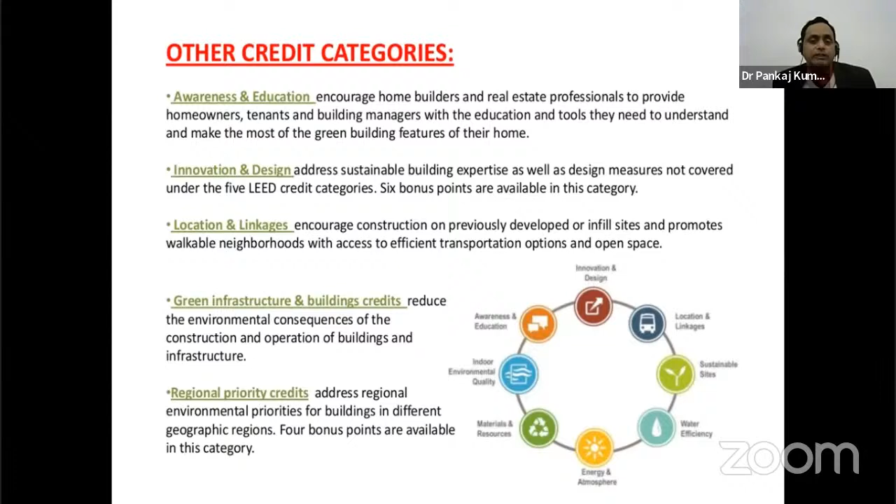These are the basic achievements by the main building. Main credit categories are sustainable site, water efficiency, energy and atmosphere, materials and resources credit, and indoor environmental quality. These are the attraction features of the main building categories, along with awareness and education, innovation and design, location and linkage, green infrastructure and buildings credits, and regional priority credits.

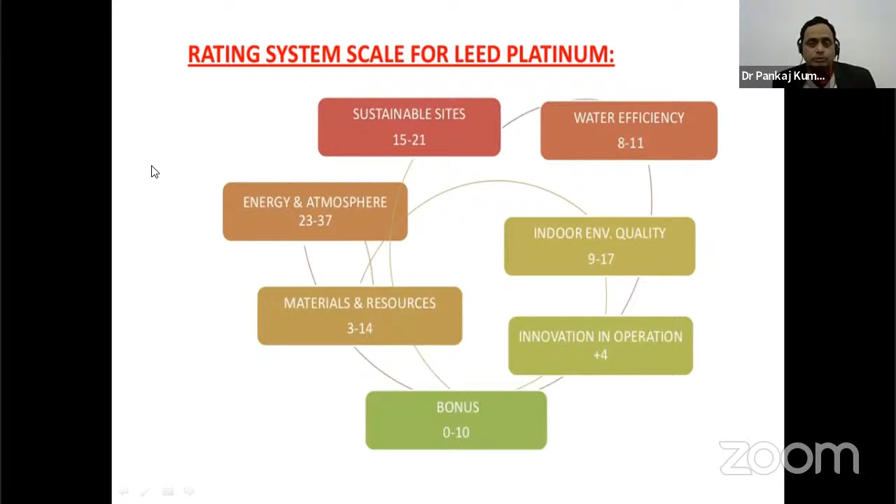These are the rating systems for the achievement of the LEED certification. This must fulfill the quality. If you see about the project, how to register a project: you can choose register, submit, and review, and then certify for the LEED certification.

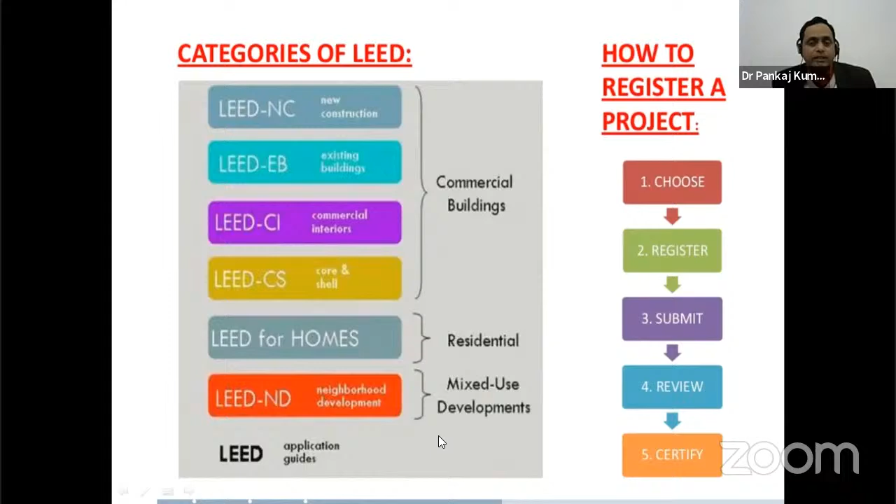LEED certifications are provided for commercial buildings as well as residential and mixed use developments. There is LEED new construction and major renovations, LEED for existing buildings, and LEED for interiors.

If you think about LEED certification, there are 4 types of ratings in India. In India, there are 4 certificates: certified at 32 to 39 points, silver at 40 to 47 points, gold at 48 to 59 points, and platinum at 60 to 80 points.

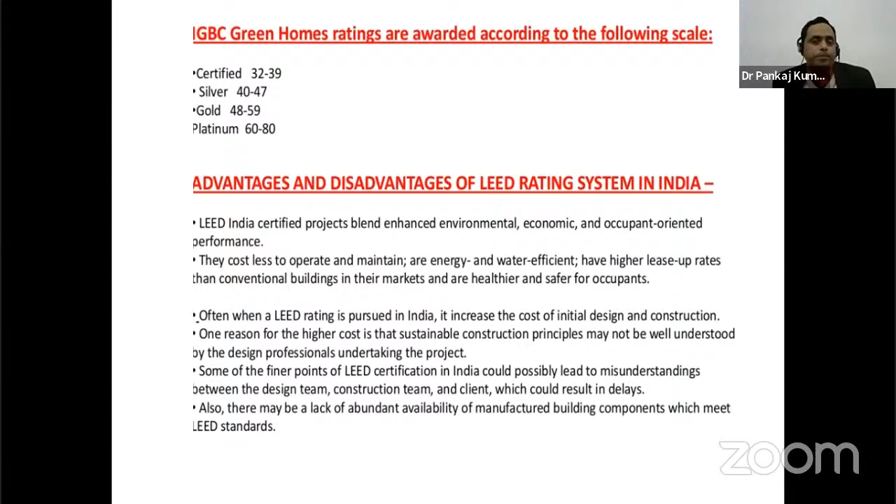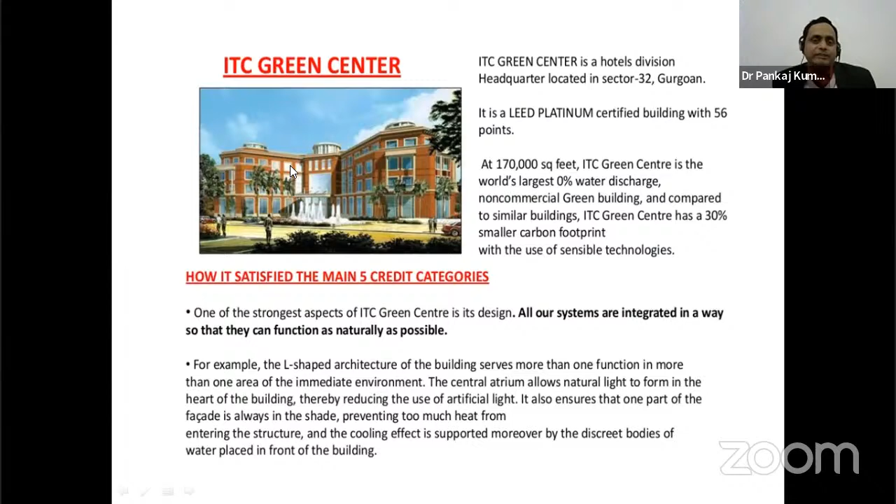The ITC Green Center is an attraction of green building. ITC Green Center is a hotel division headquarters located in Sector 32, Gurgaon. You have to see about the green building concept in the ITC Green Center. I hope you must enjoy that green building.

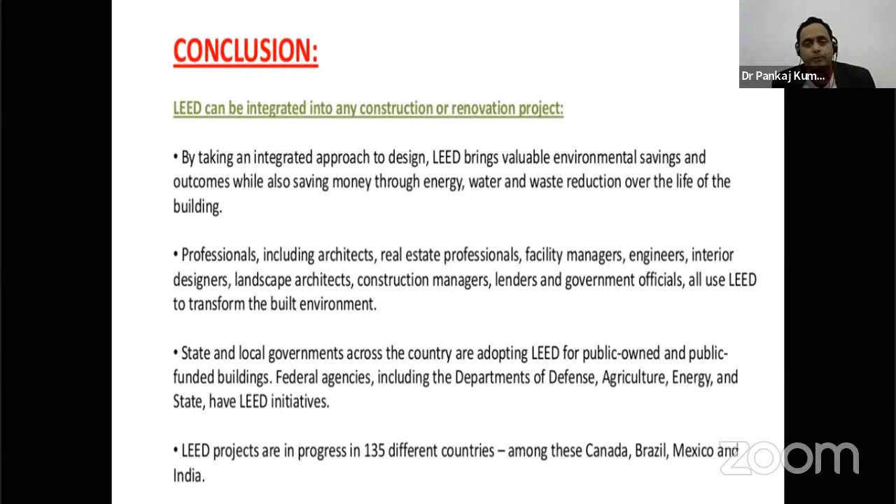In conclusion, LEED can be integrated into any construction and renovation project. By taking an integrated approach of design, LEED brings valuable environmental saving. So, thank you.